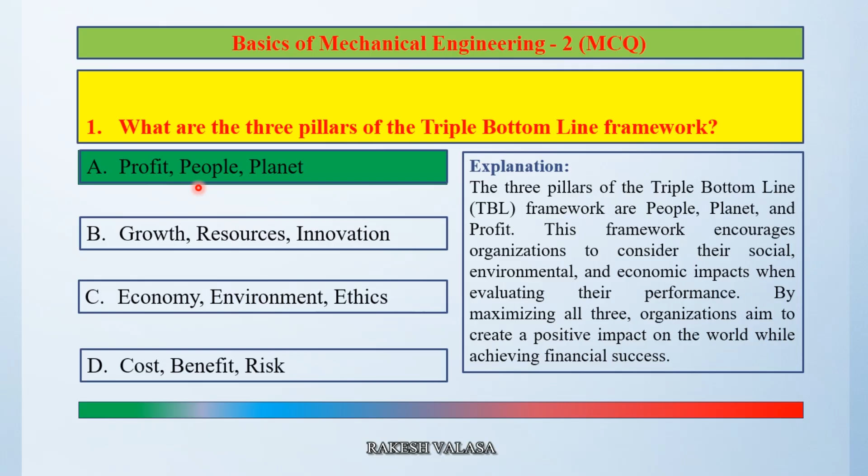Question number 2. What is the primary advantage of green machining over conventional machining? Option A, higher tool wear. Option B, reduced environmental impact. Option C, increased cutting fluid usage. Option D, higher energy consumption.

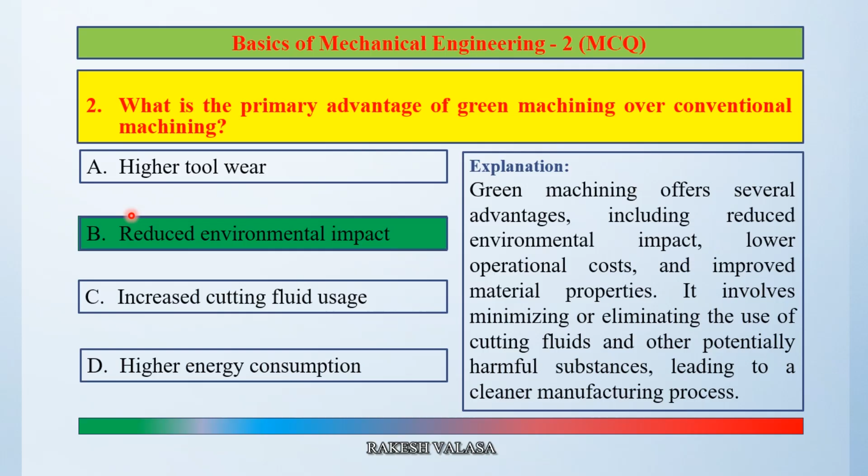The correct answer is option B, reduced environmental impact. Let us see the explanation. Green machining offers several advantages including reduced environmental impact, lower operational cost, and improved material properties. It involves minimizing or eliminating the use of cutting fluids and other potentially harmful substances, leading to a cleaner manufacturing process. So the correct answer is option B, reduced environmental impact.

Question number 3. Hybrid machining. Option A uses only mechanical cutting forces. Option B combines multiple machining processes. Option C requires more cutting fluid. Option D generates higher waste.

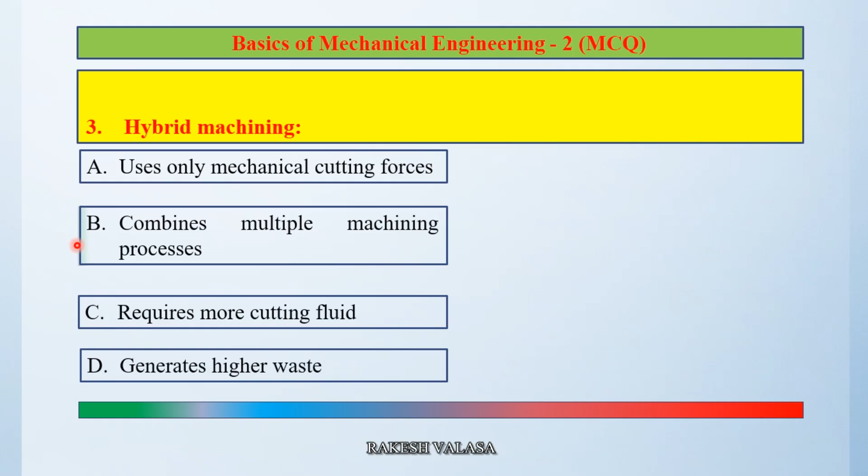The correct answer is option B, combines multiple machining processes. Let us see the explanation. Hybrid machining combines two or more machining processes either simultaneously or sequentially to overcome the limitations of individual processes and achieve desired results. It can involve traditional machining methods like milling, turning, and drilling with other techniques like laser, ultrasonic, or electrochemical processes. So the correct answer is option B, combines multiple machining processes.

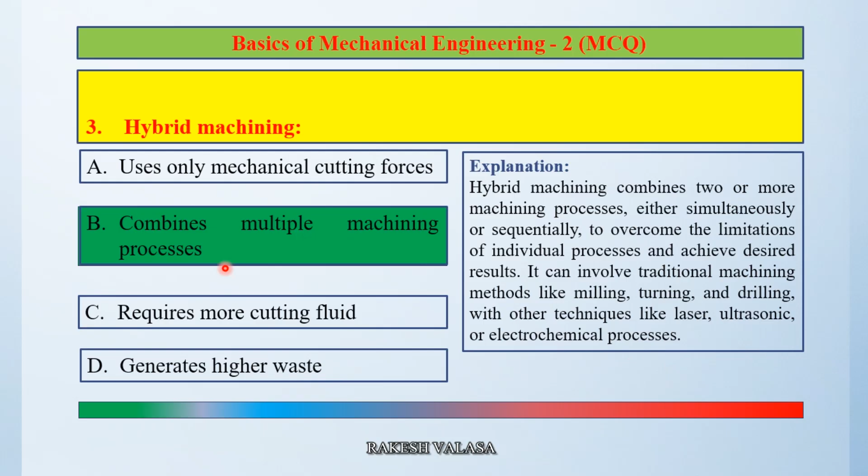Question number 4. Which of the following factors primarily govern tool wear reduction in minimum quantity lubrication machining? Option A, droplet size and oil concentration in aerosol. Option B, high pressure coolant flow. Option C, increased cutting speed. Option D, excessive tool hardness.

The correct answer is option A, droplet size and oil concentration in aerosol. Let us see the explanation. In minimum quantity lubrication machining, the factor that primarily governs tool wear reduction is the reduction in cutting zone temperature due to minimal amount of lubricant applied, which allows for better heat dissipation and prevents excessive wear on the tool. So the correct answer is option A, droplet size and oil concentration in aerosol.

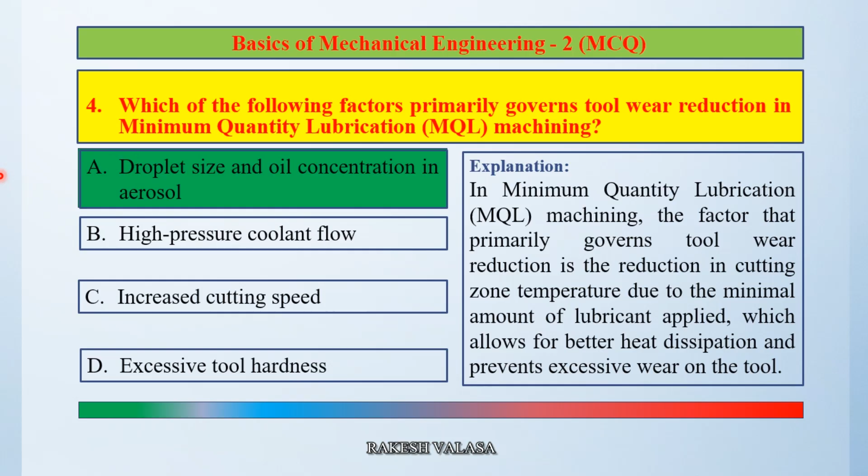Question number 5. The primary goal of environmental sustainability is option A, to increase industrial waste. Option B, to balance human development with nature conservation. Option C, to maximize fossil fuel consumption. Option D, to ignore pollution control.

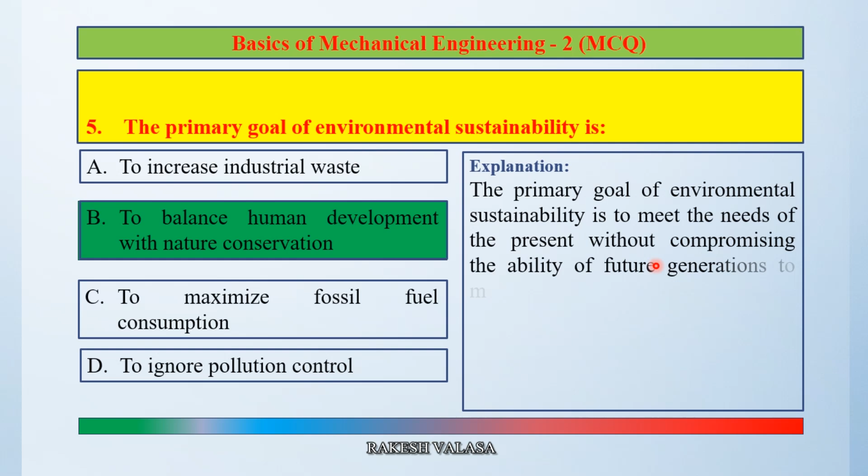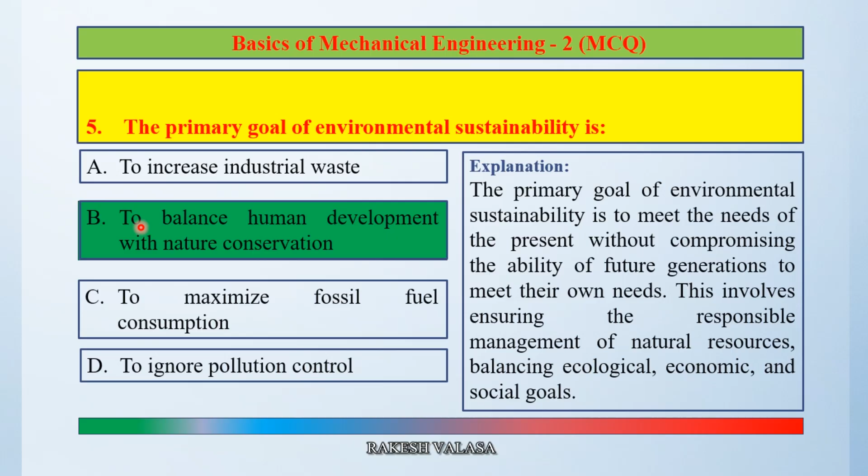The correct answer is option B, to balance human development with nature conservation. Let us see the explanation. The primary goal of environmental sustainability is to meet the needs of the present without compromising the ability of future generations to meet their own needs. This involves ensuring the responsible management of natural resources, balancing ecological, economic, and social goals. So the correct answer is option B, to balance human development with nature conservation.

Question number 6. Which of the following is a key principle of economic sustainability? Option A, overusing natural resources for short-term gains. Option B, promoting ethical business practices and efficient resource use. Option C, ignoring long-term financial growth. Option D, reducing innovation in industries.

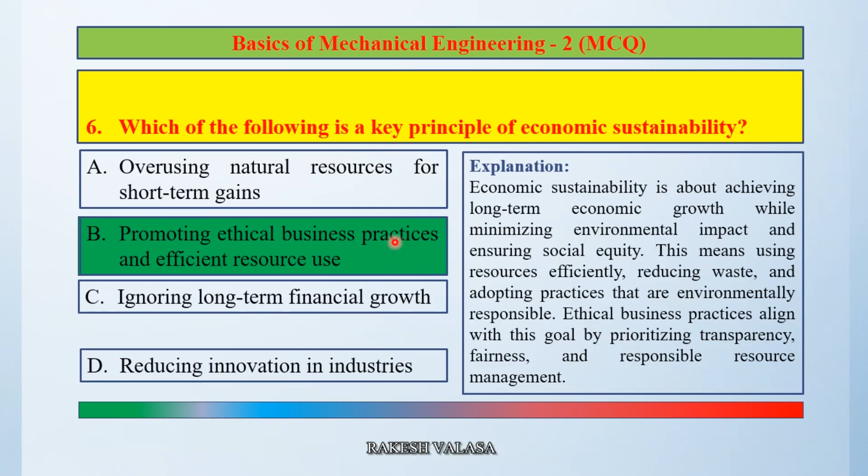The correct answer is option B, promoting ethical business practices and efficient resource use. Let us see the explanation. Economic sustainability is about achieving long-term economic growth while minimizing environmental impact and ensuring social equity. This means using resources efficiently, reducing waste, and adopting practices that are environmentally responsible. Ethical business practices align with this goal by prioritizing transparency, fairness, and responsible resource management. So the correct answer is option B, promoting ethical business practices and efficient resource use.

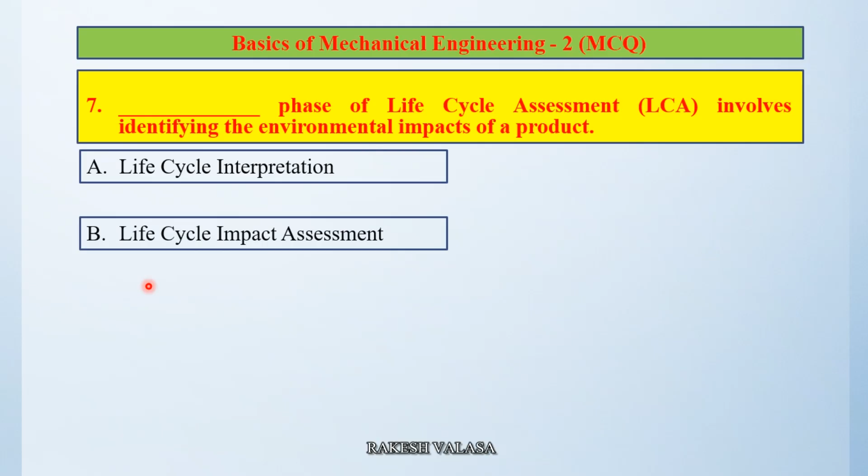Question number 7. The blank phase of life cycle assessment involves identifying the environmental impacts of a product. Option A, life cycle interpretation. Option B, life cycle impact assessment. Option C, goal and scope definition. Option D, inventory analysis.

The correct answer is option B, life cycle impact assessment. Let us see the explanation. The life cycle impact assessment phase of life cycle assessment involves identifying and evaluating the environmental impacts of a product or service. This phase analyzes the potential impacts associated with a product's life cycle stages, including raw material extraction, manufacturing, use, and disposal, according to a post on carbon trail. So the correct answer is option B, life cycle impact assessment.

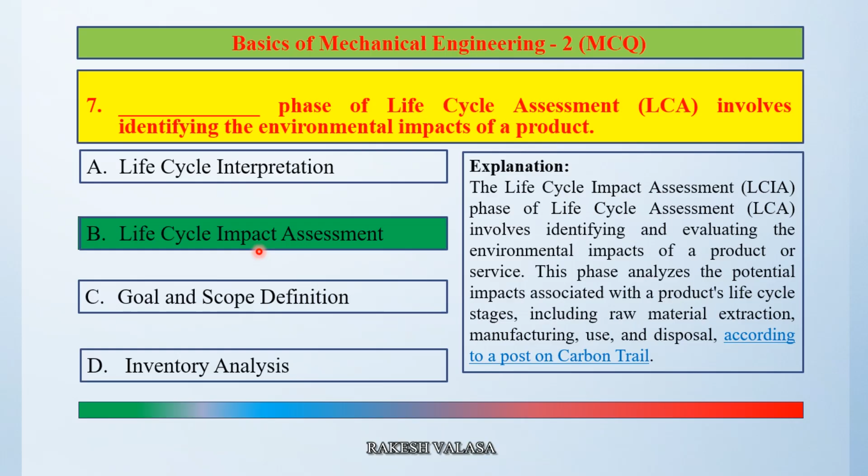Question number 8. Net present value and cost of ownership are blank metrics of sustainability. Option A, environmental. Option B, financial. Option C, social. Option D, none of these.

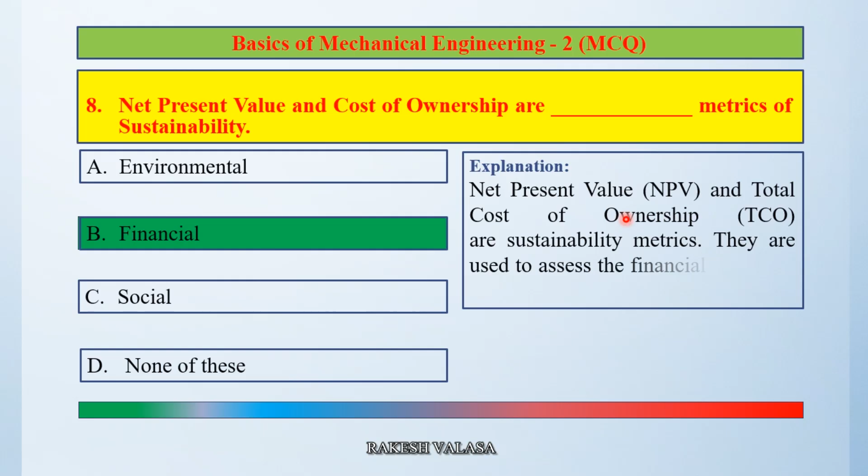The correct answer is option B, financial. Let us see the explanation. Net present value and total cost of ownership are sustainability metrics. They are used to assess the financial impact of sustainability initiatives and projects. So the correct answer is option B, financial.

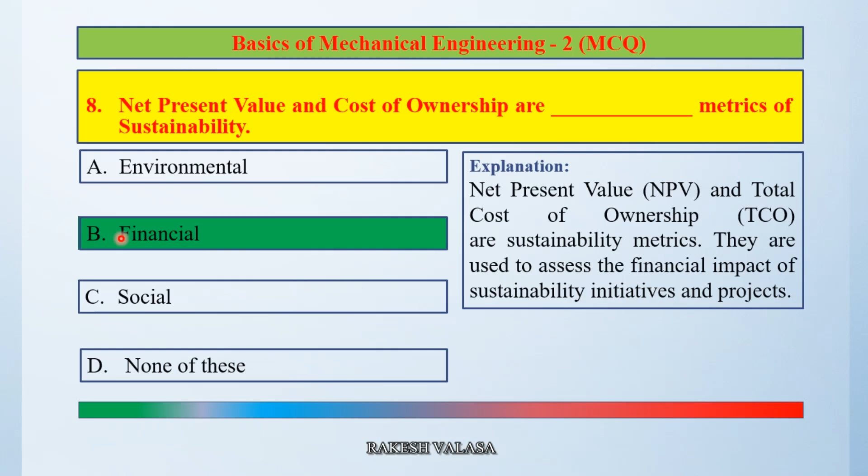Question number 9. We focus on increasing blank efficiency when use phase consumption is low and manufacturing phase consumption is high. Option A, product. Option B, process. Option C, factory. Option D, none of these.

The correct answer is option B, process. Let us see the explanation. When use phase consumption is low and manufacturing phase consumption is high, the focus should be on optimizing the production process itself to minimize waste and improve efficiency. This is because a large amount of resources are being used in the manufacturing stage, so optimizing the process can significantly reduce cost and improve overall efficiency. So the correct answer is option B, process.

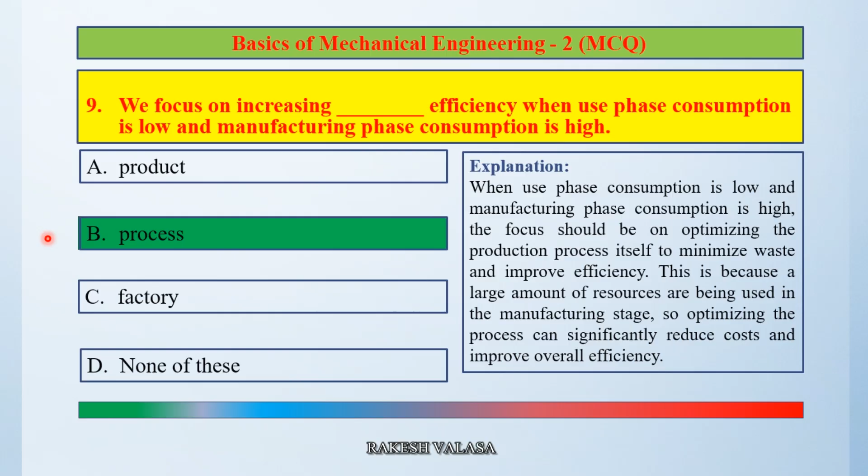Question number 10. The process parameters used to optimize the processing time in drilling for green manufacturing could be option A, feed rate. Option B, spindle speed. Option C, number of flutes in drill. Option D, all of these.

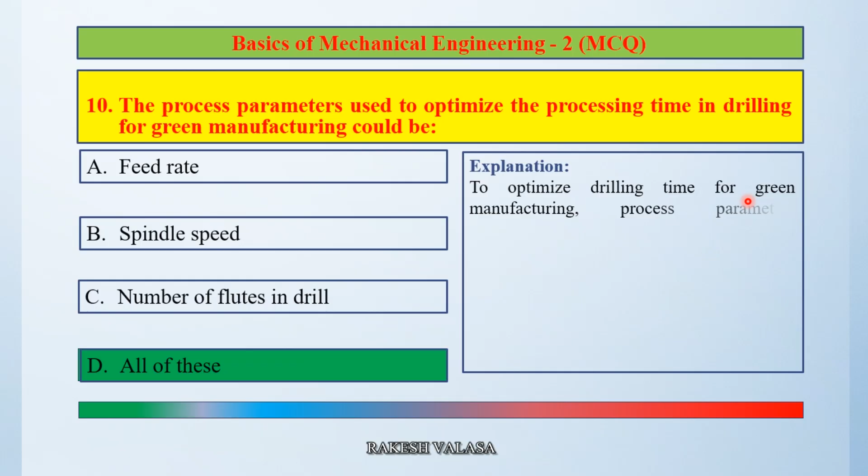The correct answer is option D, all of these. Let us see the explanation. To optimize drilling time for green manufacturing process, parameters like speed, feed rate and weight on bit can be adjusted. Additionally, factors like drilling fluid characteristics and parameters in green machining techniques such as laser or electrical discharge machining can also influence the process time. So the correct answer is all of these.